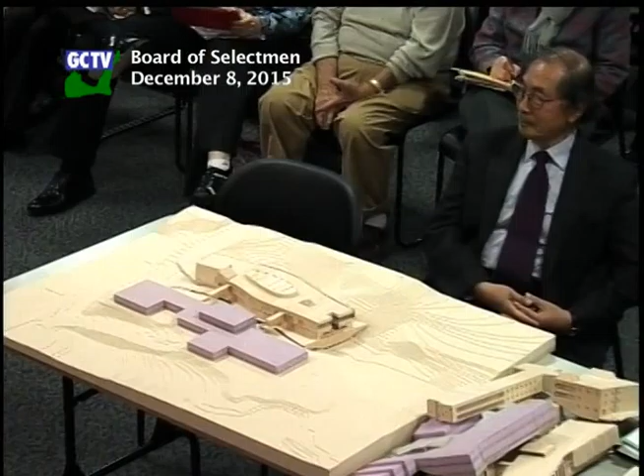Since Thursday's meeting with the board, we have continued to think about the issues and questions that were raised. As I've represented in the past, this is a schematic design, a work in progress. I'm here to listen to your comments, and if it's possible and necessary, we can incorporate some of the suggestions you make. So I would like this to be a dialogue between us.

With me this afternoon are my partner Tai-Soo Kim, sitting here, and Jesse Saylor, who you may have met before. Sitting in front of you is a three-dimensional model, and we see the massing of the existing New Lebanon School up on the plateau, carved out of styrofoam in pink color. Next to it, built out of basswood, is option number 1.

What I'm going to do is ask Tai-Soo to talk a little bit about option number 1, and then we can go back and talk about some of the other options and what our thought process was for all of them.

Good afternoon. My name is Tai-Soo Kim of Tai-Soo Kim Partners. I will explain briefly how this design started, and I think that helped a great deal. Why is this building this shape and this idea?

Before the interview, I came to the site, and we were told this entire area is for a future school candidate, and the existing building was going to be removed. So I walked the site, a really wooded area, and I thought it's possible we can build this new school without removing the existing building during construction. I thought that's a very good benefit for the town because, number one, you save quite a bit of money, and number two, you don't have to relocate children. So I thought about that.

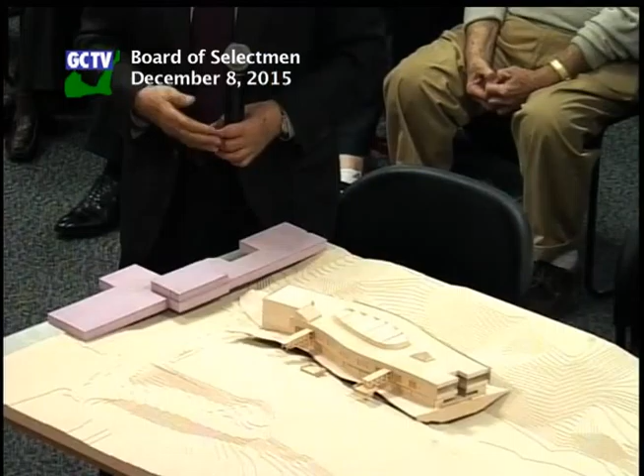I'd like to listen to your concerns, and there is a lot of room to revise and improve. For example, we have already moved this building almost 30 feet further to the property line, meaning this building will move about here - so that means away from the wetland more, and also away from the highway.

And a few other things I heard about, concern about the bridge - we certainly can do something else other than a bridge. So I'm here to listen to your comments. Shall we stay with just this, or continue with other designs?

I want to take a minute and refer the members of the board to page 4 in the handout that we gave you. Page 4 is a site plan that illustrates the footprint of the building, and that footprint is now, in this diagram, moved further north, as was suggested. So the footprint of the building is right on the property line, right on the right-of-way line that goes between the school site and the playfield. You can also see the bus loop and the pickup and drop-off area by cars.

Now let's flip to page 15. Page 15 illustrates two plans - one of which is option 1, shown in the image below, and superimposed on it is option D revised, as it was presented to us. In the lower right corner, I numbered the pages.

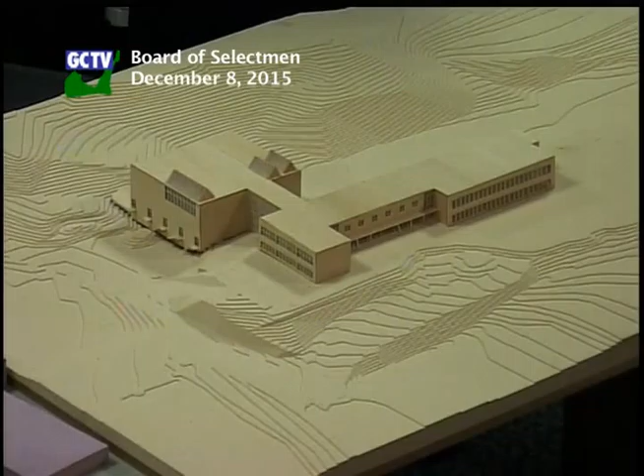Option D, which Jesse is putting on the site right now, is basically an L-shaped building, if you will. This was our attempt to try to improve the parking circulation up on the plateau. If you look at the footprint of option D revised, it has a building block and a U-shaped footprint adjacent to it - that's what the diagram shows. Page 28.

That U-shaped configuration takes up a lot of room up on the plateau. So what we recommended is take that U-shape and stretch it out in linear form. What that does is allow more acreage up at the top of the hill that can be developed for parking and traffic circulation.

That's shown on page 29. One of the main differences is this is 3 stories high. This portion is 3 stories high, and this portion is 2 stories high.

Because of the size of the building and its configuration, and I believe option D envisioned 3 stories high, that's what it is. From our experience designing elementary schools, a 3-story elementary school is not recommended from my point of view. It's just too many up and down, and the relationship between classrooms and the gymnasium or cafeteria is not going to be very satisfactory. I think we have several questions before we go further.

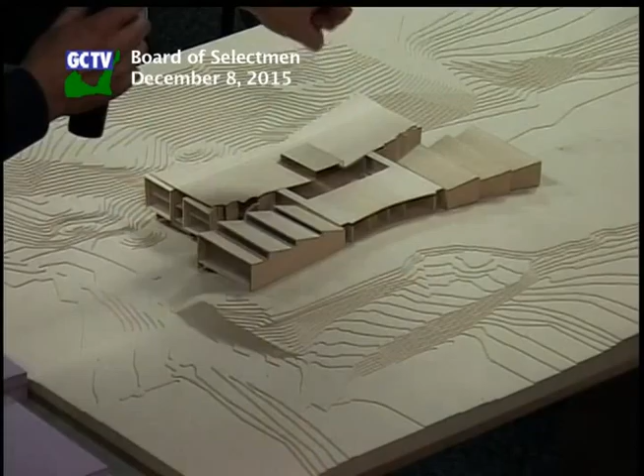So the first version of option 2 is on the model now, and that has the single story portion up on the upper plateau, which is gymnasium, pre-K kindergarten, and administration. It had this large courtyard separating to a back portion of the building with the cafeteria, classrooms, science and art, and that was 2 stories for all the academic areas.

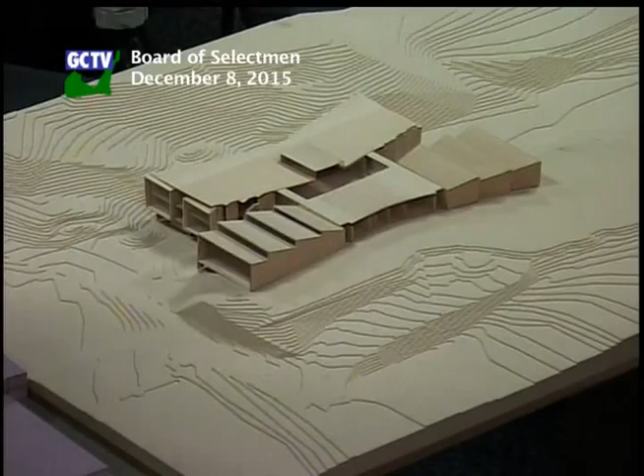And after receiving your initial round of commentary, we understood the interest in keeping the building to the north and to the west as much as possible, and the impact on the amount of area the building disturbed in the woods to the east of the building. So we came up with option 2 revised.

I'm now switching to it, it's page 22. Just something like that. Option 2 revised simply moves classrooms from the south end of the lower wing to the north end, and it comes up right to the property line.

You can see on page 23, we've overlaid it with the Scheme D revised footprint that you gave us, and it substantially fits within the construction area of the Scheme D footprint you gave. The exception would be the parking and the play area to the south on the upper plateau. However, those areas are underneath the existing building, so to remove the existing building would require you to address them in some way anyways in the original Scheme D revised plan.

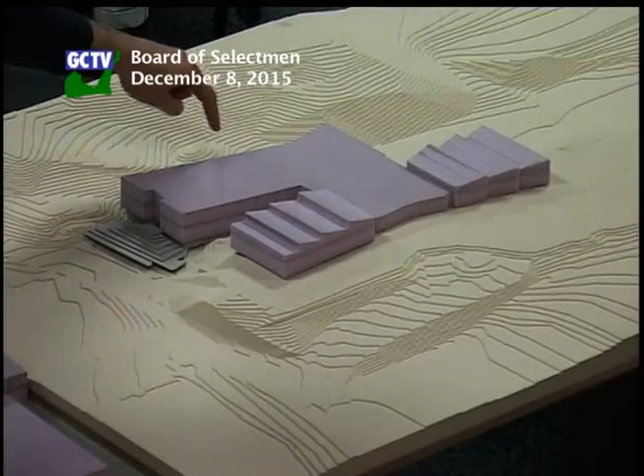So your other comment was, would the gym be at the lower level with access to the field? We have considered that in this option, though you won't see it on page 24 and 25 as currently laid out that way — we continue to show the gym on the upper plateau. We do think there is a possibility of increasing this footprint slightly at the lower level and placing the gym at the lower level to achieve that.

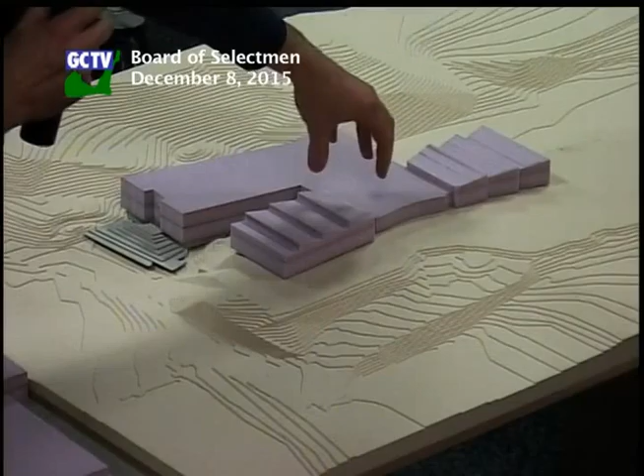The con, perhaps, is that the interior circulation works quite well for after-hours activities to access the gym via the parking and entry at the upper level. And so in any scheme, when you move it to the lower level, that's a trade-off — it requires opening more of the building to use the gym.

For my two colleagues as well, in comparison to D aside, option 1 versus option 2, the pros and cons when you're comparing the two — can I have your professional opinion on that?

Well, I think option 1 has a more cohesive interior. It's really one building, and the interior spaces are more consistently open. Option 2, the interior works pretty well — I think relative to our ability to work with the D-revised footprint, it's a great improvement in terms of the openness of the spaces to each other, the ability of the school program to function.

Maybe you want to add to that. Yes, well, I know there is a sort of concern of a negative feeling about this deep ravine, if I may say that. As you can see, all 3 schemes, including D, we do have some portion of the building in that. So we are dealing, regardless which scheme you go, you are dealing with these things.

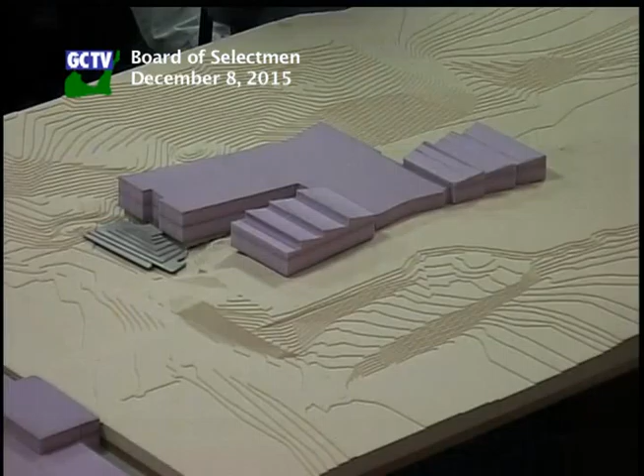I believe my colleague asked, so is 2 essentially revised Scheme D? Did I hear that or no? Yes, so what we're looking at is D re-revised, for the most part, because we talked about it in general terms of a campus, defined as all the accompanying facility you need to have the school operate—emergency access, parking, the refuse area for pickup, and all of that. So that model in front of us conforms generally to what you believe we approved in that revised schematic dated June 23rd from Gisolfi. Yes, and the proof of that is diagram 23, which shows the D scheme overlaid on top of this re-revised diagram. You can see that if you were to draw a dotted line around the perimeter of that improvement, they would be virtually the same.

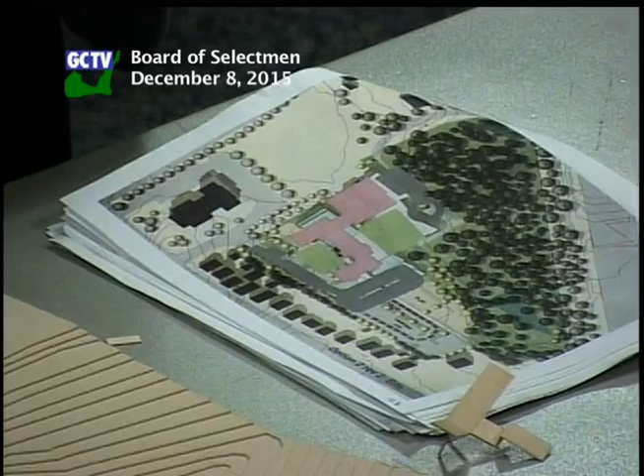Can I ask a hypothetical? Sure. Back to D now, not revised or revised again, back to D. If you presented a drawing or a schematic that the client didn't like, but they didn't have the option of going into more land because there's no more land, what then? So if this board comes back and says we want to see another D, do you think that will be any different than what you're showing us, or are you telling us this is it? Well, if you're asking me if this can be developed? No, I'm asking about D. D? Yes, what this board voted on.

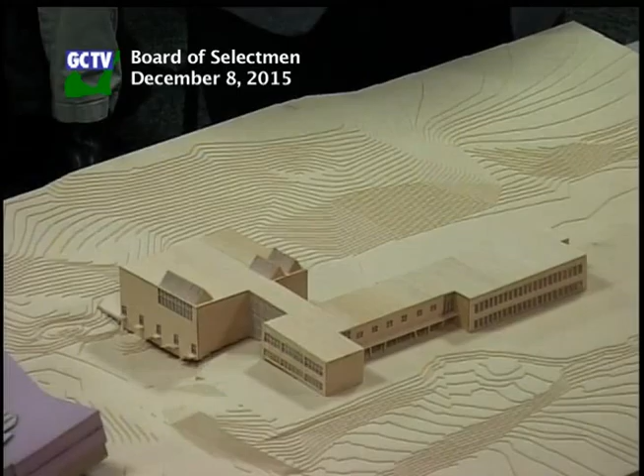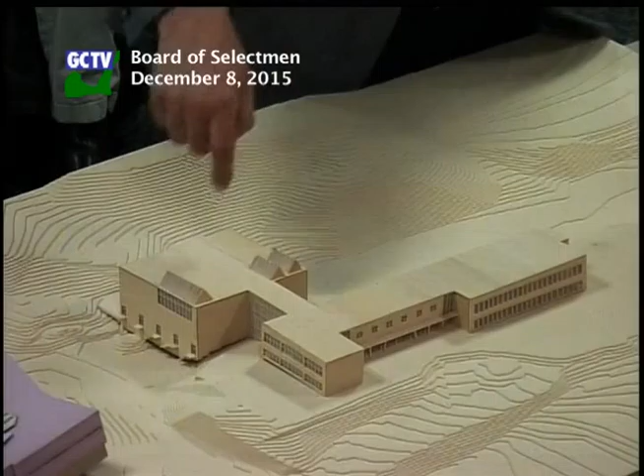Using part of the ravine or woodland area—but if we just didn't like it, if your concern is 3 stories, and there was no other land to go to, what would you tell the client then? We would tell the client you need to give us some more latitude. But my question is, if there is no more latitude, and I'm asking so that's it—if we direct you, or through the building committee or whatever, to say we want to see another D, a different schematic, a different drawing, are you saying then that cannot be done? Of course it can be done, but why constrain us with this hypothetical? That was the question though. So it could be done. Hypothetically, sure—if you said this is absolutely the only land that's available, you must be within here, sure, we could do it within there.

It would look completely different. Would it look a lot different than what you presented to us now? In terms of massing, no.

You would have an arrangement in a linear form here, with classrooms on both sides of a corridor, and you'd have a 3-story block here, with a connection between the two. We could shift this a little bit, that could be shifted a little bit, but essentially, that's the form.

I'd like to comment on why we did not do a U-shape. If you look at the original Scheme D, the site plan is not good because we don't know where the bus drop-off is, and there are 3 different parking areas. There's no major entrance to the school, which is really crucial for an elementary school. The bus parking and play area all need to be easily visible for security reasons. And because the D scheme occupies a large portion of the upper part, you just didn't have enough land to put in a good, proper site layout.

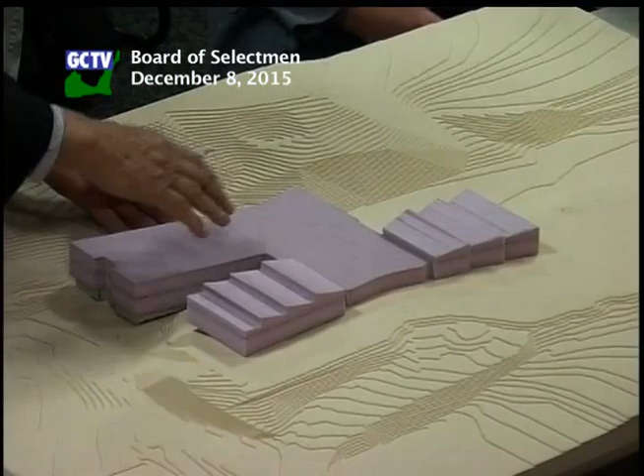This portion is one story high, sitting on where the existing building is. And this two-story portion is sitting entirely in that ravine area. So it is bridging between the high ground and the low ground.

So in looking at the renderings, the model is easier for me to process. There are no bridges externally, as there are with option 1.

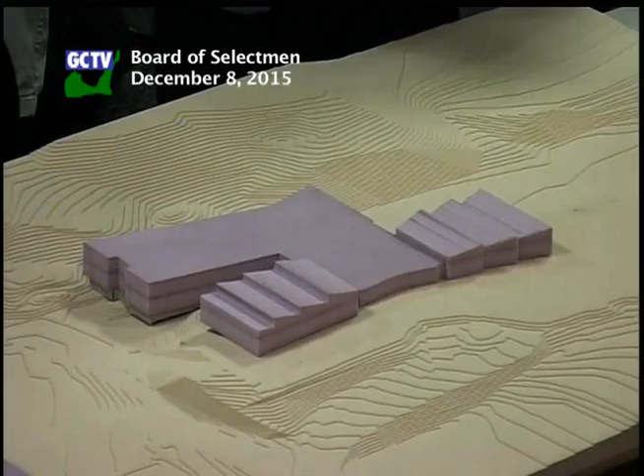Internally, this building is bridging these two different elevations. I want to point out that if you compare this with the original Option D, you'll see that there's a bar configuration here, and in the original D there's a block here.

But D also has a playground at the low portion of the site. Instead of a three-story block here, we made it a two-story block, and we took the playgrounds and put them up on the plateau. So that model has how many parking spots? I know parking was referenced at the meeting. Is it 72?

75, and now there's roughly 25 on that side. That's important to point out too, because in terms of this board and hypocrisy, what you're saying is here the kids have an open playground closer to 95.

Yes, it is. That's important to point out. We can't say it's a problem that the building is closer to 95, but then be okay with this when the kids are closer to 95. So if we're going to use that as one of our arguments, we have to be fair.

Excellent point, thank you. And then finally, in terms of your designs, have you taken into consideration—it was very much a topic of interest by one of the former board members—we actually had someone speak to it, and it had to do with off-site construction.